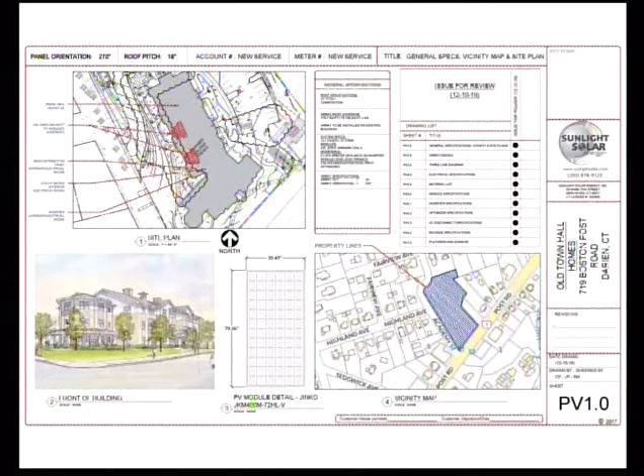Here's a closer view of those locations. They are located between the eaves on the building, and this is the long side of the T of the building. Again, going back into the site, these will not be viewable from the Post Road, and they are well hidden on the roof line there.

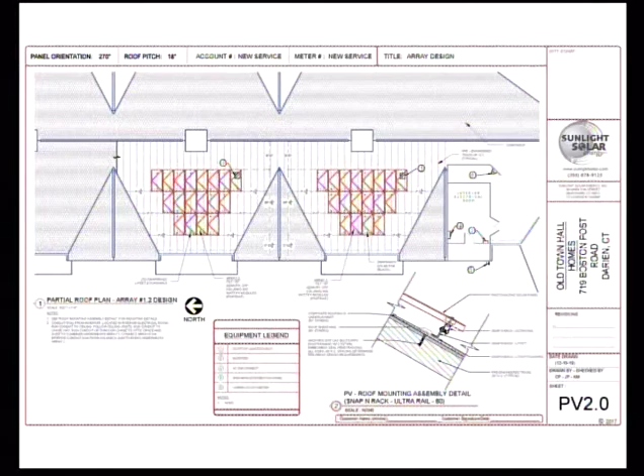So this is a small array, about 16 kilowatts.

Oops, sorry, how do I minimize this? You'll be able to see it if you're coming off of Highland, taking a right or a left onto Academy Street, and they will appear as they are there between the eaves.

So what you're saying, Todd, is when you're back in the neighborhood on the north side of these buildings, if you take a right as you're coming down Academy towards the Post Road, you'll be able to see them. Coming south on Academy, you'll be able to see those, but you won't be able to see those when you go north on Academy up towards the housing. You won't be able to see them going north or south. You'll be able to see them coming off of Highland going east.

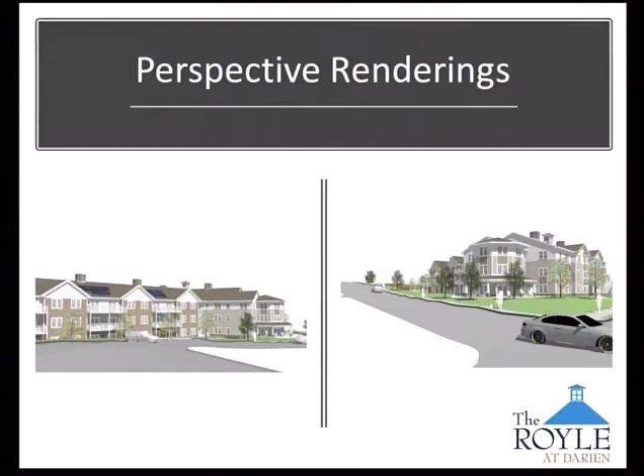Okay, is that it? Because I'm going to dive into questions, I don't want to cut you off. Yes, that's it, and we can definitely dive right into questions and try to respond to anything you have.

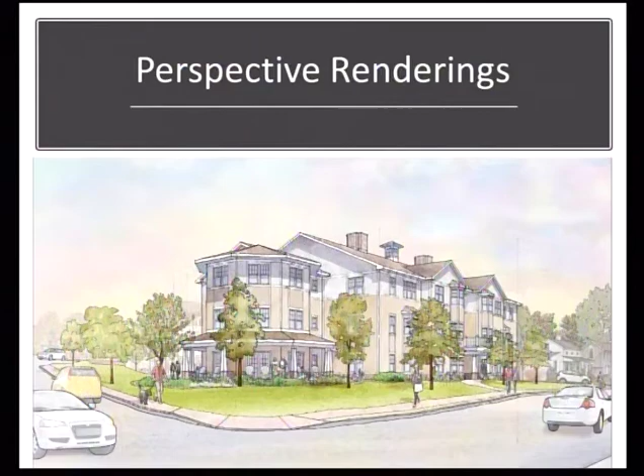I'm going to ask you a first question that I've kind of dialogued with the ARB ahead of time. Why did you choose this location as opposed to doing panels on maybe the eastern side of this roof building or an ulterior side that you couldn't see at all from a residential area?

The solar arrays have to be on this side to optimize the rising of the sun. Because on the other side, because of the way the pitch is, and also the direction it's facing in, the solar array would not be effective from that perspective. Got it, okay, thanks Todd.

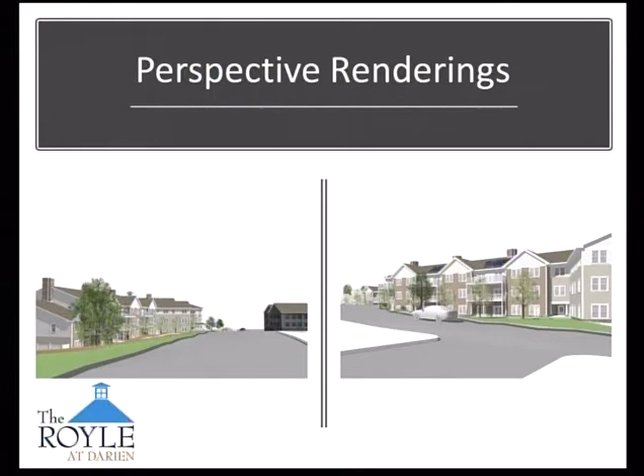The only other opportunity we had to pick up some optimal areas for the solar was along the Post Road. We elected to leave those off. We thought it might be objectionable, and wanted to present a cleaner finish to the Post Road side, which is really our entrance. I agree on that point. I figured where they are being put is the best location, with regards to the view and the roof lines. I was just seeing if there's any other way to maximize the coverage, which I'm sure has been reviewed thoroughly with the installer.

So besides that, solar panels being what they are, I have no objection to having them put on there. I'll mute myself. Dave, thanks so much. Those are great questions. Next up, Sean Brown.

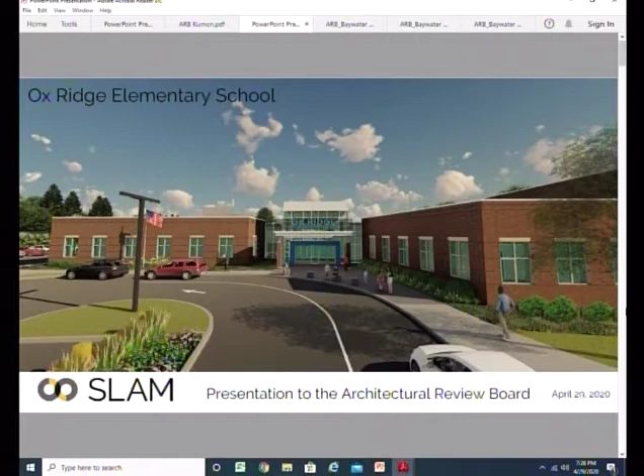And this is the site plan. Can you see the site plan on the screen? Unfortunately not, you lost it. It went to Technicolor bars. Okay, wait a minute. I'm going to try sharing the entire screen. Okay, no worries, Amy, we understand this stuff, there's always technical fun at the beginning here. Yeah, great, we got you. Is that any better, Amy? Yep, you did it, good job, okay, there you go.

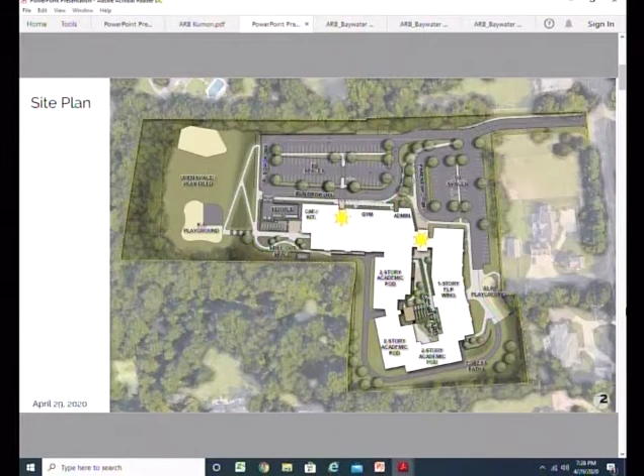So that should be the site plan on the screen, and I'll let Dean go ahead. So we're talking about the new Ox Ridge Elementary School. If you can follow along with some of the text on the building, I'll talk about that first. To the left-hand side is the cafeteria gymnasium component, which we're calling the assembly wing. Directly adjacent to that, on a slightly upward level, is the administrative component and the entry component, indicated by the star. I should point out that the second star is a secondary entry that relates to the bus drop-off. So what we really have is two entrances: one for parent drop-off at the upper lot, and a secondary entry related to the bus drop-off component there. You can see that queue of buses along that long stretch of pavement there. Parent drop-off, again, Amy was using the cursor to indicate parent drop-off there.

We've developed a two-story academic wing. We're calling them pods, there are 3 pods on 2 different levels. They are associated with grades, and they are linked together to create that donut shape with a 1-story ELP wing, which is the early learning program. There is an early learning program playground associated with that wing, and to the very left-hand side of the screen, there is open space and playgrounds associated for the elementary school.

The site slopes from the entrance to the left-hand side of the open space quite steeply. This has allowed us to create these plateaus. The open space and the playground exist on a plateau. You can see the shading there—that is a slope that brings you up to the next plateau, which is the parking lot and the assembly wing.

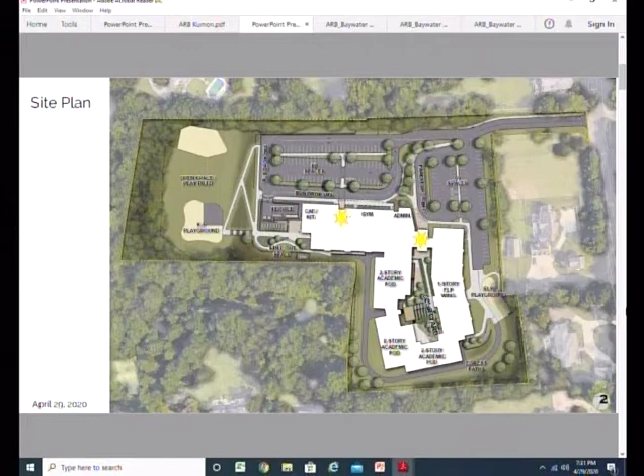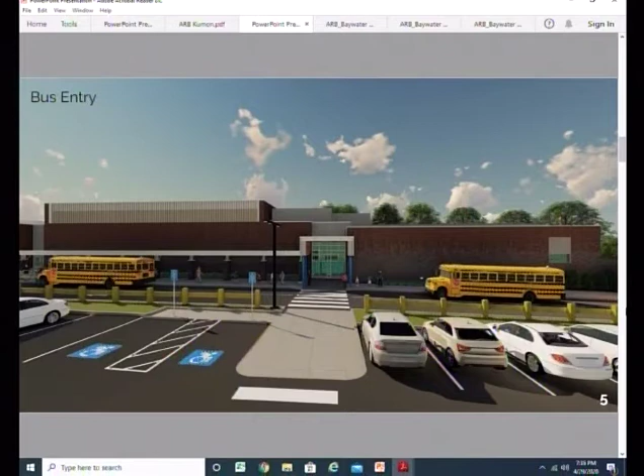There was some discussion last time about the columns. As the design has progressed, the entry canopy at the main entrance has gone away, and this entry canopy seems to be more functional as it provides cover for the students as they get off the bus. We've gone to a single column which is pressed back, so we've tried to negate some of the issues that we had with too many columns.

I think we feel that this provides a clearer path for the students to get off the bus, quickly move to cover, and then move to the entrance. You can see we've used a series of smaller blue columns to help act as identifiers to the entrance.

So anytime we use a gesture to signify entry, we use a blue gesture. We've employed a clerestory, which is a polycarbonate material that is slightly opacified so it lets muted light into the gymnasium. We've also used screening right above the door to help hide much of our mechanical units.

We've also employed a pattern in the brick here called an Ombre pattern. It's a two-color brick. We've used accent brick and body or main brick throughout this project, into the classroom pods and the ELP. So really what we have is a building that kind of grows out of the ground, and we think this helps root the building to the ground, using those two bricks in a playful way that speaks of an elementary school.

There you get a better sense of what that Ombre pattern is - kind of the gray brick at the base that fades into the body brick, or main brick, right there on the right-hand side of the rendering.

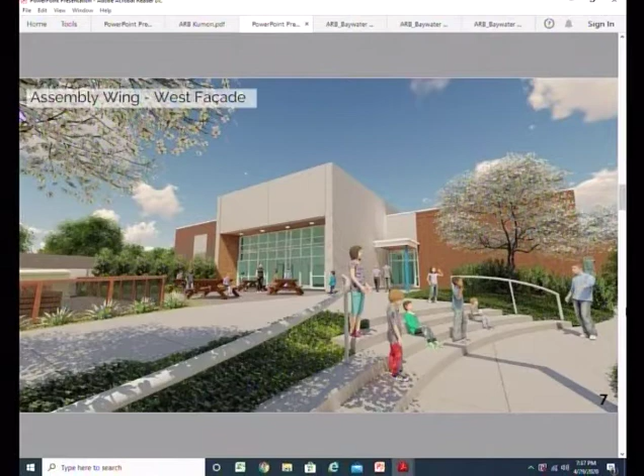As we move around the building, we're now looking at the tail end of the building, which you would begin to see from the open space or the playgrounds at that lower level. This is the cafeteria.

We're using that same wood-look piece here to soften the soffit and the walls as you look out of the cafeteria. This has a very transparent look so you capture the view out of the cafeteria to the playgrounds. There's a patio outside the cafeteria for outdoor dining and spill-out that could also be used as classroom or teaching space.

Directly adjacent to the patio area is a garden, which is part of the curriculum. There are raised garden beds, and we really like the idea that this could perhaps be used by the school as a farm-to-table type aspect, but it also has an educational feature to it.

Directly adjacent to the box of the cafeteria is an egress or ingress point to the building. Again, we have a blue column signifying entry. This allows students to go to the playground and into the building in the morning. We've created a series of steps here that act as a mini amphitheater and gathering space for a class of students and some outdoor teaching, beginning to connect you to the backside of the building.

Okay. I think we only have one or two left. This might be the last one.

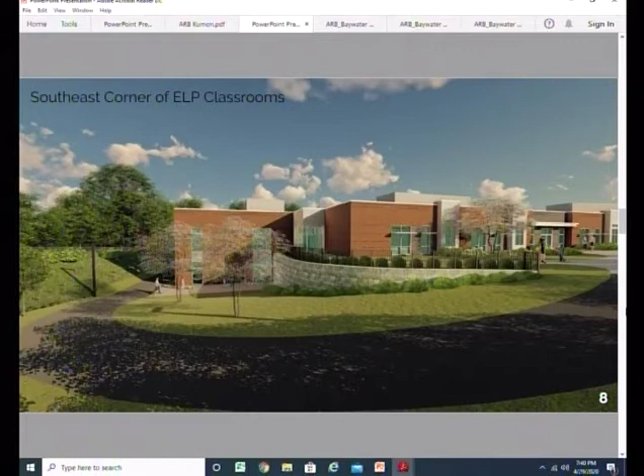We're using that cast stone head over the window. There's a soldier course of brick that links the window heads together, and underneath it, as it relates to the mullions, there's a protrusion that adds a level of texture to the facade.

Further, we have a brick sill that has a relationship with the soldier course that ties the heads together, and you begin to see a soldier course and more protrusions at the top to create a capital, per se, to this wall.

In this rendering, you begin to see that you're not able to directly walk up to the window, as the landscape is acting as a buffer between the sidewalk and the building itself.

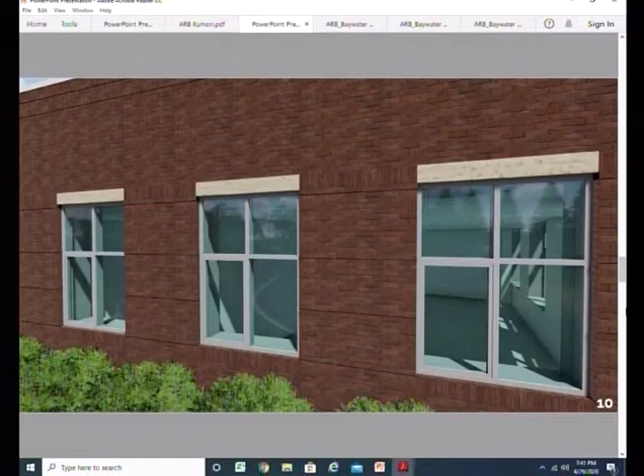The material between each window and the two-story piece, which also acts as cladding on the cafeteria, is this metal panel. This is a 12-inch sample, so that's a 6-inch face with that reveal there. We're trying to give a larger volume a smaller scale, one that feels more residential and clapboard-like. The aluminum soffit is actually a wood-look soffit.

That was the piece underneath the bus entry and at the cafeteria. The mechanical screening—unfortunately that picture is turned the opposite direction, it runs horizontally, not vertically, the ribs—but it's a perforated metal panel that is the same color as the metal wall panel, with a perforation so you begin to see sky through it as it screens the mechanical equipment.

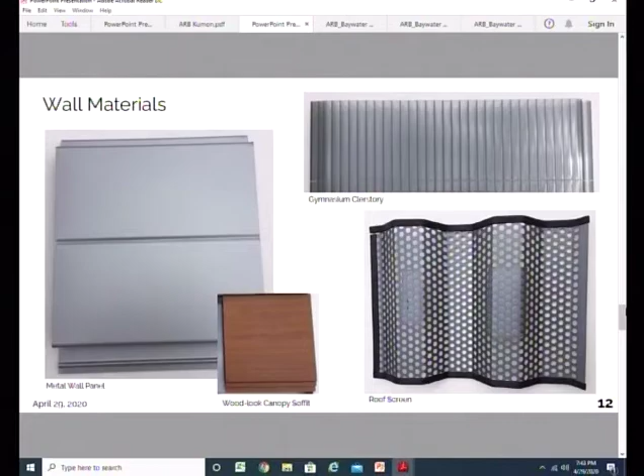And now we're open for questions. Hold on. Whoever's talking, can you please identify yourself and your relation? Oh, this is Sean.

Thanks, Sean. Hey Dean, on the bus entry you've shown on your screen versus the pictures in our packets, the handicap parking spaces have changed design, and you've removed the tree just to the left of the entry sidewalk. Is that the correct drawing you're showing, or is the one we have correct? This rendering is correct.

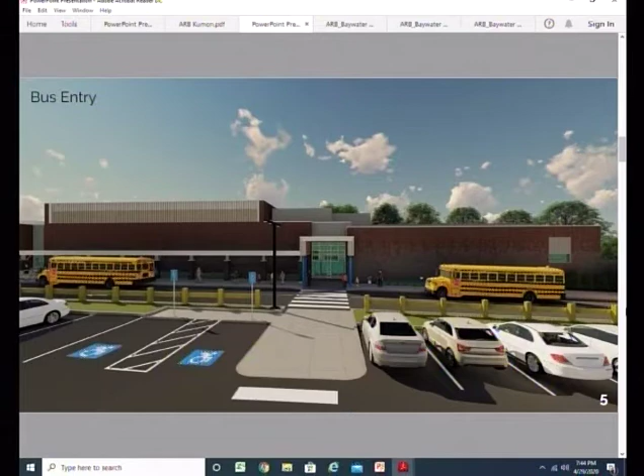This is Amy, if I could explain. I didn't know you had a different image, I apologize—I thought I sent this exact presentation. But we have been maximizing the number of parking spaces as we look ahead to the planning and zoning meeting coming up on May 12th. We recently received word from the superintendent of schools and the principal as to their exact faculty count, so we've been working to maximize the parking count, and that was one of the sacrifices we had to make on this location.

Sean, while you're on, do you have any other additional questions? I got one for Amy.

Okay, Amy, where are we putting the address for the building on this? Because normally I like to put it on the front door of the building right above the entryway. I usually like to ask, but this has got a long driveway coming in. I can't remember what we decided for signage with the team, the building committee up on the street.

Sure, so I did pull the signage photo out of this presentation because we haven't developed the exact sign yet, Sean, but our intention is to replace the current sign in kind. It's designated by the planning and zoning regulations to be a certain size, and it's a hanging sign, maybe 3 feet tall by 2 feet wide. That's where we would put the sign, and then 395, which is the street number address for Mansfield.

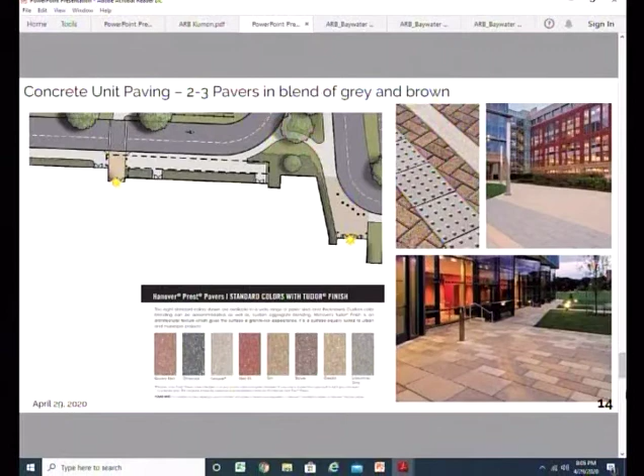This is a section we shared in case you were wondering about the site materials. We have concrete sidewalks, traditional concrete, for the most part. But at the entry, this is the main entrance of the building, and down here at the bus entrance, there will be pavers in a blend of colors. These are the standard colors the product comes in, but we'd select the gray color, limestone gray, to match some building elements, and brown or tan to blend with that, just at the entrances.

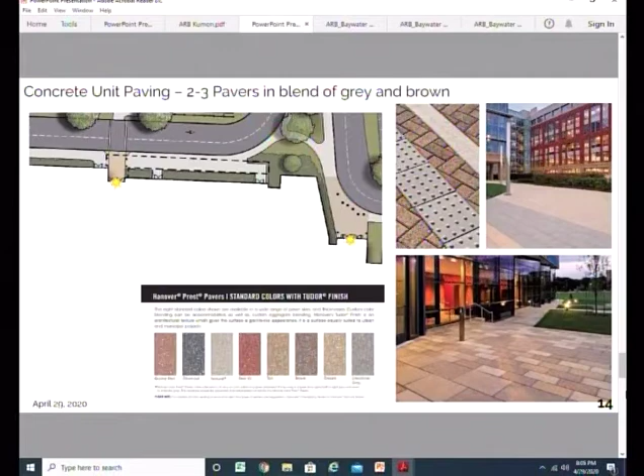What are the little bumps, the spots with the bumps going up there? Oh, sorry, this is a specialty crosswalk paver. Is that for sliding, for slipping? It's for indication, for those sight impaired to feel that they're nearing the driveway.

In terms of all your flat paving, you're doing several different styles. Are you going to put the paving together the same way, so it has some unity, or will they all be slightly different? I'll go back to a rendering that shows a bit of the pattern. Difficult to see, but the intent is for a specialty paving pattern right at the entrance only. Otherwise it's just a concrete sidewalk.

Okay, and that goes through the other entrance too, with playgrounds and the rest of the stuff. Is there some continuity between the colors? I know some look very brown and others gray between the different paving elements. Right, so the photos you're seeing on the materials page are just a sample, a photograph of the product at a different building. But we'll be selecting just 3 out of all those colors, and they'll be complementary to the brick tone of the building, as well as to the gray brick.

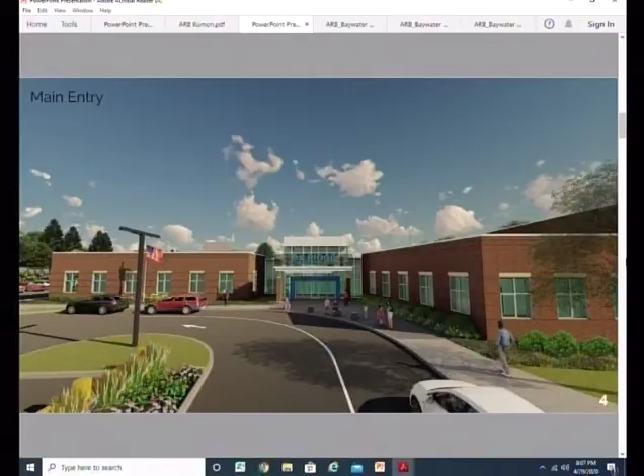My question was about having some unity, it wasn't clear. All right, thank you very much. You're welcome. Okay, that's everyone through the ARB. Does anybody else have any other questions? If you do, you can unmute yourself and ask one at a time, if anything else has come up.

No, great. All right, Fred, you can remove the screen sharing. That wraps up the presentation for Oxbridge School. Amy and Dean, and I can't remember who else was on your call. Amy and Kemp, thank you guys. Based on the feedback here, it looks like you've gotten a favorable report. Congratulations, good presentation. Thank you. The one feedback I'll note in my letter is the consideration about using a larger panel at the front entrance to make more of a monolithic look there, like was discussed.

Yep, I hate this thing. Okay, and someone's off mute that I can hear. Sorry.

The last thing I'll add, when you return to us, you'll be coming back with a signage plan at a later date. We look forward to seeing you then. As part of that signage plan, I didn't see any plan for the lighting on the site as a whole, a larger lighting plan. So if you guys could include that when you come back with your signage plan, we'd appreciate that. We don't have to waste time here. Exactly. Okay, will do, thank you.

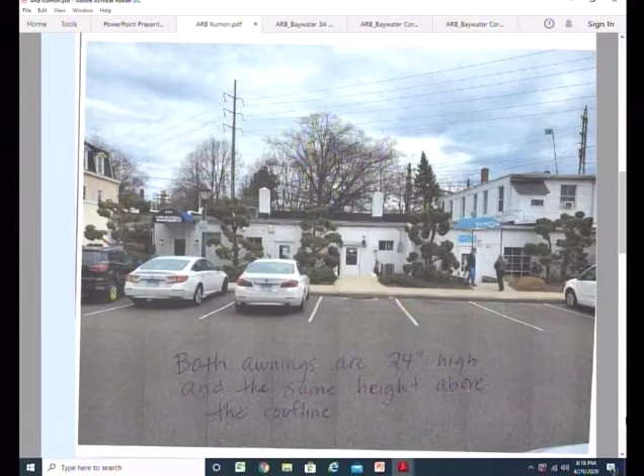Yeah, to be honest, I don't know how much consideration was taken into the lights when they did the rendering itself. This picture looks quite different—you can see them from that first picture. Is it the same fabricator as the Caldwell? It is, okay. Well, clearly he's just not drawn it the way he'll actually do it, because it'll have to be some kind of a cutout to accommodate the fixture. Right. Yeah.

I did notice that the Caldwell awning comes forward of the gutter, because you've got a gutter there that's active. So it's going to come forward of the gutter, and then it has to work around the presence of the floodlights. I don't think there's anything we can resolve tonight necessarily, but just note that this isn't exactly what's going to happen because of the lights.

Rita, based on what we did with Caldwell, do you have any suggestions or improvements there, or is that something left to the installer's discretion? Yeah, I think if he's going to follow the model of Caldwell, he will make some accommodation for the lights. It's a great opportunity to have a nicer light there, but in the interest of economy, I guess you can work around it.

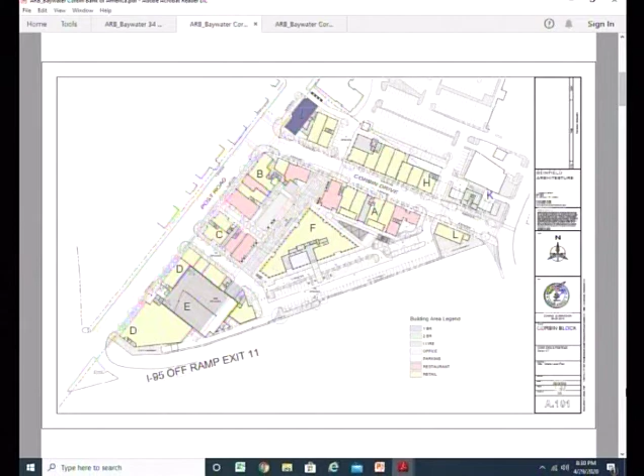And this dark shaded area at the front along the Post Road is basically a new 4,000-foot space that's been designed for Bank of America, working with us and their architects and our architects.

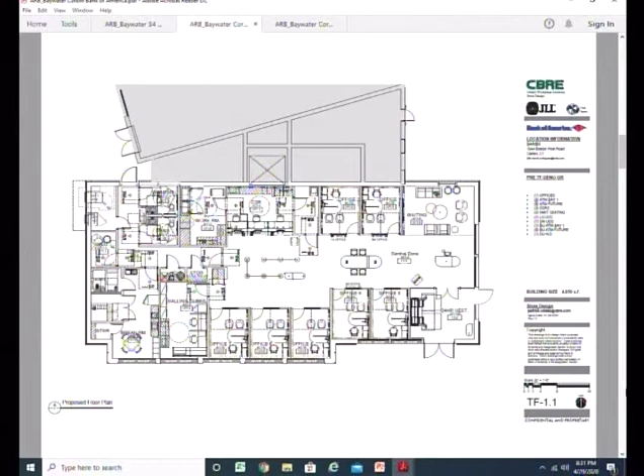But this is an interior, just showing you kind of the layout. This is the Post Road. This is the area alongside the drive-through, if you can see my cursor. And this is basically the office. It's a typical office, but they'll also have some money manager people in there, mortgage bankers. They want the reception to be on the corner, and they want an entrance on both sides, on Corbin Drive and on the Post Road, into this 24-hour vestibule that would have an ATM at the entry.

Another view, just for background. This space adjacent to them in the L will be combined into one space. This will be Barrett Bookstore, and that's already been worked out with Barrett to relocate, so we get to preserve the local bookstore, which we're excited about.

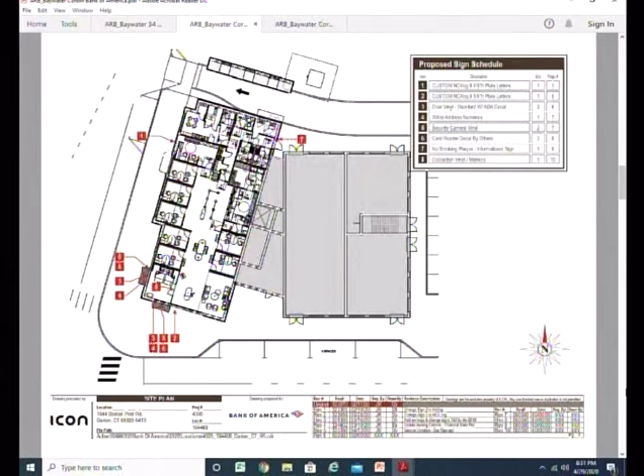And this is the signage. The upper portion of the image is the signage along the Post Road. That's the Bank of America logo with their flag insignia. That letter is 9 1/8 inch high, so it's in accordance with the regs. And there's a similar size sign on the Corbin side, which would give them a view toward the Post Road for passengers traveling down the Post Road toward Norwalk.

I just want to move this. We may come back to you as part of the Corbin project, similar to what you reviewed for Federal Realty, where you did a district-wide signage package. We may do the same thing, request the same thing for your consideration.

And as part of that, we would like to be able to do more blade signs. We love the blade signs. We think they add character and texture to the downtown. Bank of America would like to put a blade sign here, but they didn't finalize the design, so we're not asking for permission for that now. We'll talk about that in connection with the overall district signage program.

Got it. So Dave, sorry to interrupt, but that was one of my questions. So you proposed 2 wall signs and a blade sign in this proposal, but the blade sign, that's why we didn't see it in this package. You're correct.

Okay, great. Yeah, we couldn't get it agreed, so we thought we should just come to you with the total district signage. Honestly, we would not be bothering you with this application even at this point, but for the fact that Bank of America is basically refusing to sign the lease until we have everything approved. So this has been a very bureaucratic, tough process.

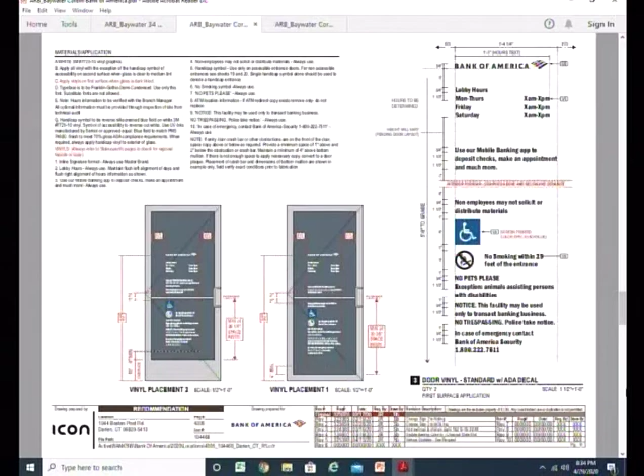Okay, and this is something I would very much like your feedback on. You see these frosted panes of glass? Yes, not the prettiest sight. I'm just going to go back for a second.

Bank of America would like to frost all of the glass, basically all of the lower level glass along the post road. I have to be careful what I say. I don't particularly love that idea. I had a view of what your thoughts might be on that. They're saying it's a new standard, but we know there are other locations where they haven't done it.

They are telling us this is very important to them in context of moving the branch. So what we would ask you to consider is that request. If you have suggestions as to an alternative, like privacy screening or using some kind of glass treatment that would provide them with the privacy or security they're looking for without closing off the branch—that's a long facade, and so we're a little worried about it. But we have to, given our position in this situation, advocate for it, and it could jeopardize the lease.

That scares me, to be candid. But we would like your feedback on that, and I guess we could talk about all your questions at the end. But that's the one thing we're a little worried about.

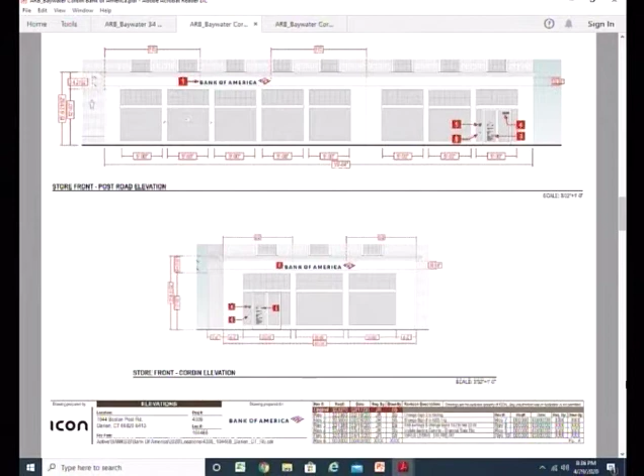Okay, got it. This is all the detail on signage, like hours and details of the logo and lobby hours and so on, on the doors. That's the number, at 6 inches and 11 and 3/4 inches across. This sits—let me just go back for a second to show you where that is. I apologize. That sits above, in the right hand corner of this door, the 1044, and that's in accordance with the town requirements now.

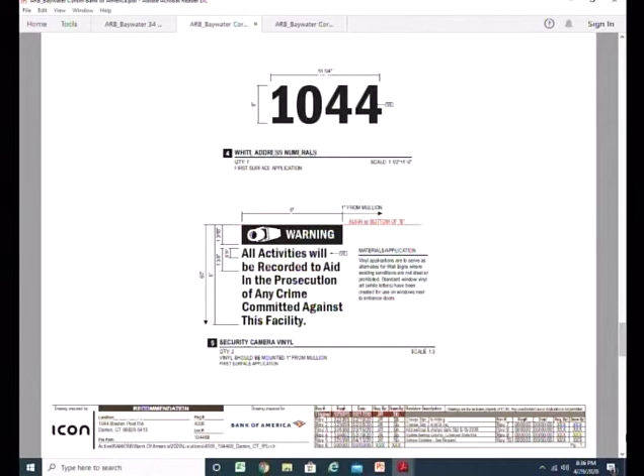And this is the typical signage for the ATM entry. No smoking—that's a building standard or bank requirement now. And that's it for the Bank of America signage application.

Okay, that's great, Dave, that's great. If you're done, we'll just go through the members one by one, and we'll have them also—hopefully some of them might be able to address some other suggestions for the frosted glass option. So it's just the two wall signs, and then the door? Yeah, I think the door static cling work, which looks standard, and then the glass. Yes, correct. Okay, correct, great.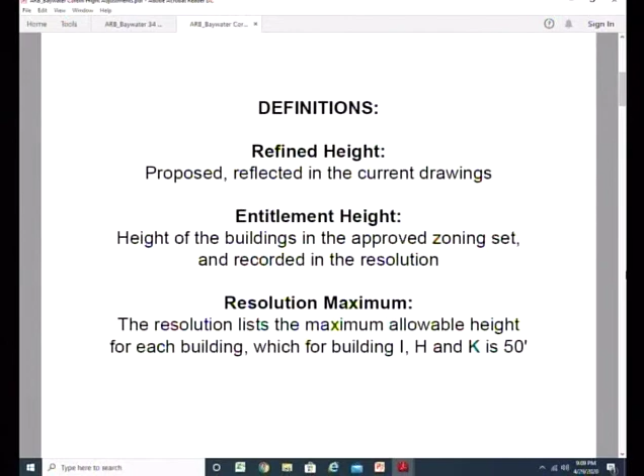So this is what we call Building I. This is the Bank of America building that we just talked about—that's the branch, this is the drive-through. The building below, the drawing below, is what we originally designed.

Beinfield Architects was trying to build, in the original design before Bank of America really engaged, a building that would be kind of a sister building to 1020 Post Road. You can see it had a more residential look on the post road, with a typical storefront here. We thought the bank branch would be smaller and that this would be a different store. It turned out the bank wanted the entire post road.

Most importantly, the owner of the building, Vinny Durentis, and his wife Kathy, did not like the dormer-style windows because they had seen the buildings at the apartments at 1020 Post Road, which have those windows. They're not as light, not as bright, and the ceiling heights are lower. So they wanted to do something different.

So working with Bank of America, Vinny, and all the various parties, we came up with this redesign of the building, which gives us more of a full 2 stories. We still have the dormers, but they're expanded. There's a different storefront, and to accomplish this we increased the building height by 8 inches. It's still 7.5 feet below the maximum we would be allowed.

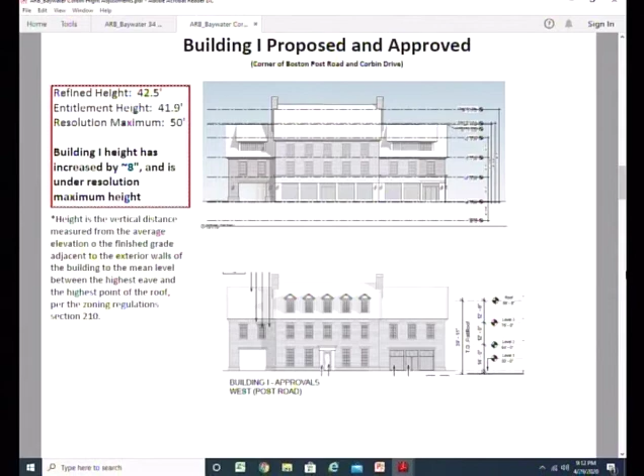And then the last building, the Tibbetts building, the refined height, or revised height, is 41.8 feet. The entitlement height was 44.5 feet. The resolution maximum was 50 feet. So we reduced this one by almost 3 feet.

What we also did, because we had more time, is change the bottom image as well. The bottom image is the Corbin Drive elevation. You can see it had a door here and just typical residential-style windows. These are actually 2 stores.

So when we thought this through further with Bruce Beinfield, this didn't really work. So the image above is the actual proposed version with proper storefronts. This will be the entrance to the apartment building, and this will be a small store, and this will be a small store. So the basics of the building didn't change much.

It's a little bit different. These are garages, there's not stores here.

Kate, weren't we talking about putting a door here too to make this kind of look symmetrical? Yeah, we've been playing with the location of that door right now.

The elevation drops, right? Yeah, we have a bit of an elevation drop. So we have that door actually exiting out the right side of the elevation, into the small park, where someone can exit out there and then come around to the front.

But we may sort of work in a symmetrical door instead. So that's the summary of those changes.

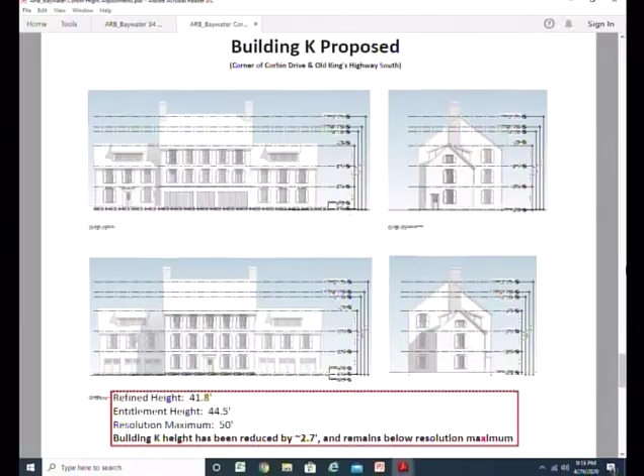Liz, could I just ask a procedural question please? Is the ARB now reviewing the changes to the height of the building, or are we reviewing the changed design of the building?

We're actually going to consider everything. Oh, okay. David Riley? Yeah, that was my exact question.

The height question, I don't think is really an exception. I don't think there's any detraction, and I think there are some improvements in the height. But in the scale of the buildings, it's very minor, and it falls within regulations, so I don't have any problem with it.

What I would like to address is some of these facade changes, because there are substantial changes on the facades. I think the roofs are more minor in comparison to what's been done at the base level, particularly building H, I guess is the longer one.

As part of our Corbin redevelopment project, we are proposing to reconfigure the parking lot again, a second time, behind 10, 20, and 36 Old Kings Highway South, in a manner that would allow us to create more parking. And so by buying this building, it allowed us -- this is the actual property line, this triangular shaped land -- to take down that old residential building that's been used as a private office for the last 15 or so years, and create a more modern office building, which actually we're going to move our offices to.

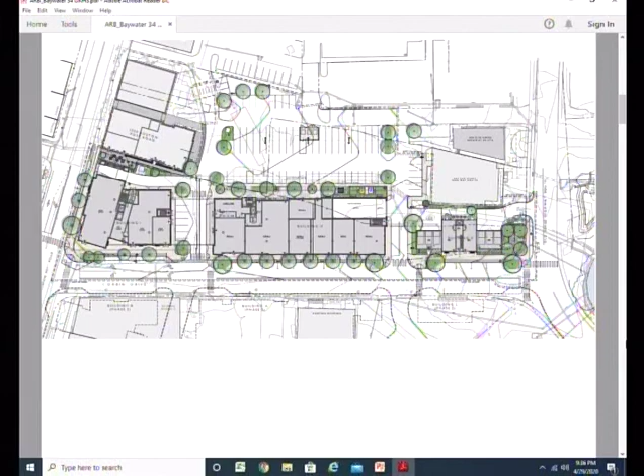What we're hoping to do is continue the pattern of improvement from 36 Old Kings Highway, from what it was to what it is, from here, and in the back it looks quite ratty, into something much more interesting and a bit more modern.

And so with that, I'll turn it over to Colin. I'll change the slides if you want to talk through the design, and you just tell me when to make changes. Sure, so you picked up the context, so I have to skip ahead in my notes to where you are.

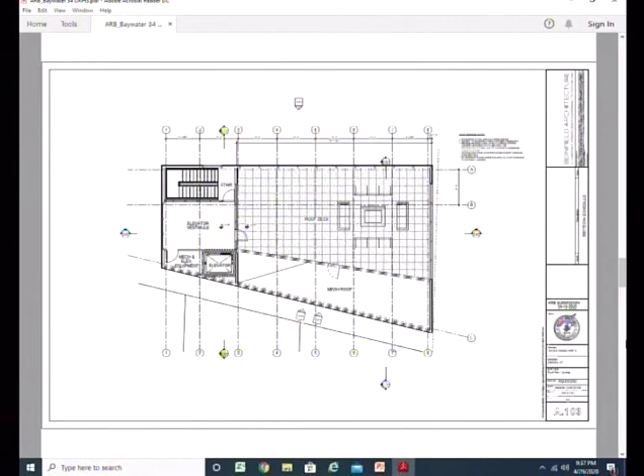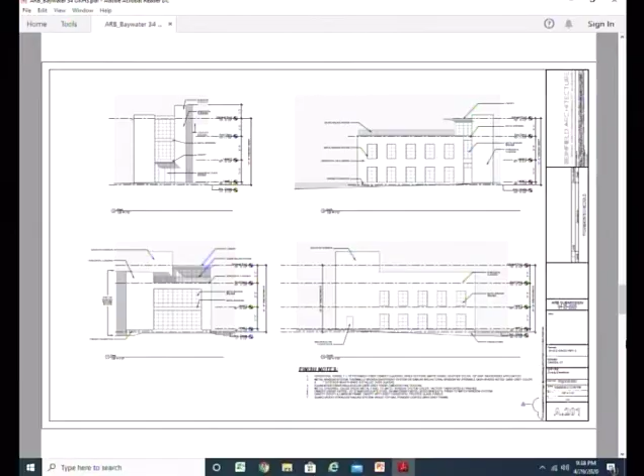So what you're seeing now is the north facade. It's a very regimented composition of windows that address natural light into the building and the private offices on that facade. The side facing the public parking has a covered awning for the main entry, and then large windows that allow light on the north side of the building.

We're accentuating the elevator core, the element on the right that projects a little bit higher, while also concealing and providing some transparency and differentiation in the height and massing of the building with that solid corner as it conceals part of the interior circulation stair. The top portion of that building is access to a roof amenity terrace for the office tenants.

The composition of the facade is primarily being looked at as fiber cement, a durable, thicker panel than your typical Hardie panels, so it's not that lap siding. It's being thought of as a more rigid, panelized product, a bit more specialty, with probably a regular rhythm of fasteners or concealed clips.

We're going to be looking at a glass and steel canopy, and potentially a folded metal canopy of some sort, metal windows with probably an operable sash in places, and a matching divided light shop front or similar window system.

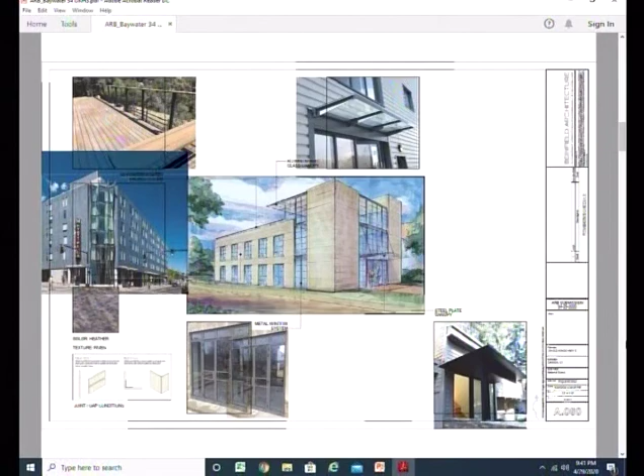Great, okay. Yeah, David, that's a very good example of one of the thicker, more high quality fiber cement panelized products. So that pretty much closes out my summary of the materials. These are just some other visual examples of how these read with a little bit of a gap reveal between the panels, and you can see that some of these have exposed fasteners, like this image we're looking at now. We can move on to the next slide.

The site plan is fairly basic. It's a little bit of a wedge-shaped site, so the building is somewhat trapezoidal and a little irregular. The parking's at the back towards the public parking, and then there's a public plaza being reconceived from what you've received, to be a bit more integrated with the Corbin District design philosophy.

Just to remind you of what's there today, there's parking in front that's kind of hodgepodge. What's happening is we're creating a bit of a mess for ourselves, but I think in the long run it will be worth the pain.

We hired a different landscape architect, Eric Rains, to help us with the landscape design for this project. Eric did a wonderful job laying out the sidewalks and the entryway.

We have two different landscape architects working with us on the Corbin project: a group called Towers Golde out of New Haven, and a sort of sole practitioner, very spirited, creative guy, more of an artist, named Dennis Dale from Massachusetts. So we have the two Corbin landscape architects working, and we had the other architect working here.

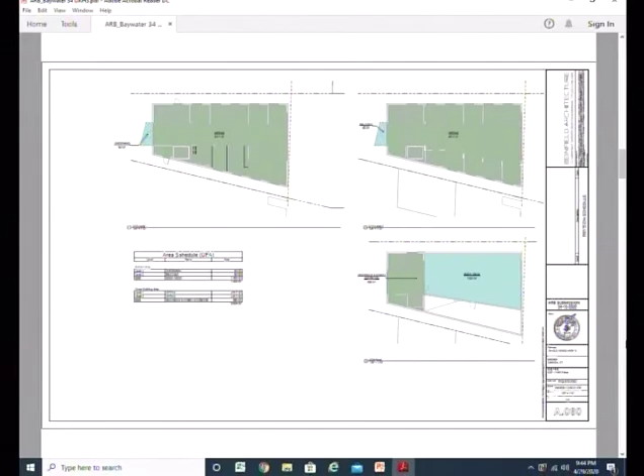This is the original landscape design, and it's been tweaked a little bit. We're going to come back to you also and talk to you about this landscaping when it's further refined.

But the architects came up with an idea of creating a bosque on this side of Corbin, of Old Kings Highway South, to create a really nice venue that the public or residents of this property could enjoy. So those architects have been looking across 23 Old Kings Highway toward 34, and they came upon the idea: what if we were to integrate the three and create a public plaza in front of 34 that's more rectilinear?

So David, you don't have a full architectural landscape plan right now, just ideas — right now you just have the building itself. Yes, exactly. That's okay, I think we have to come back to you.

We're trying to go to zoning in June, we have a hearing date in June for the building. We're totally happy to come back with more refined and detailed ideas, but I'm sharing some color for your general feedback if you like. If you'd rather put that on another night because there's enough to talk about with the building, that's fine too.

But I wanted to give you a sense of how this is being considered and what we're thinking about, which would be to create these three new, wonderful outdoor amenities that don't exist today.

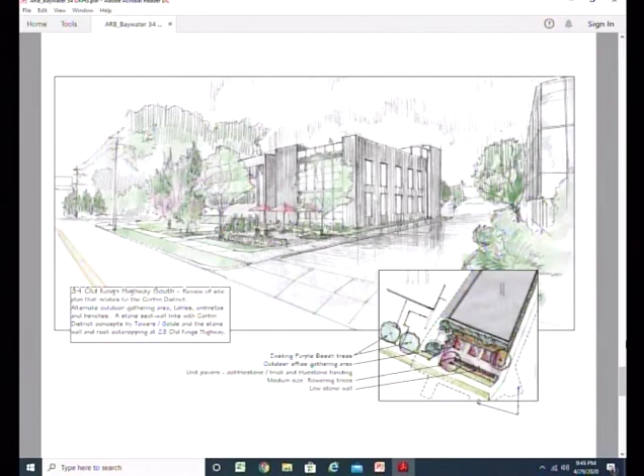I love that, David. Are you guys done with your presentation, or can we jump into some questions? Happy to jump into questions, unless Colin has other comments he'd like to make on the building design. No, I think the elevations tell the story, and the rendering covered two of them already.

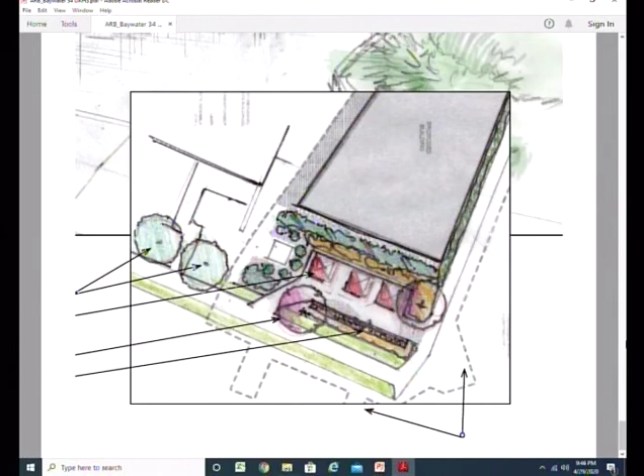So the south is essentially a repetition of the north minus the stair differentiation, and then the east — we've got an expansive window that looks out over Old Kings Highway and this new public plaza, and the Good Wives River watershed across the street.

Let me help orient yourselves, because as much as I've worked on this, I sometimes got confused for a while. This facade, this elevation, is what faces the Center Street parking lot — what one would see looking at the building from 1020 Post Road, from the back of 1020 Post Road. This is the facade that faces Old Kings Highway South. Remember, as Colin said, the site is trapezoidal, so it's an irregular shape.

It's really triangular, but it's broader, it's wider on Old Kings Highway South. So this faces Old Kings Highway South. This is the elevation facing the driveway from Old Kings Highway South into the Center Street lot, between 34 and 30 Old Kings Highway South. And then this is the facade that faces 36 Old Kings Highway South, which is going to be pretty close to 36, so there's not a lot of room.

I forget the exact distance. It might be 6 or 8 feet. It's not much, I think it's less. I think it's 5 or 6.

That's great, that's great orientation, guys. That really helps. David Humphrey, can you kick it off for us? And then David Riley.

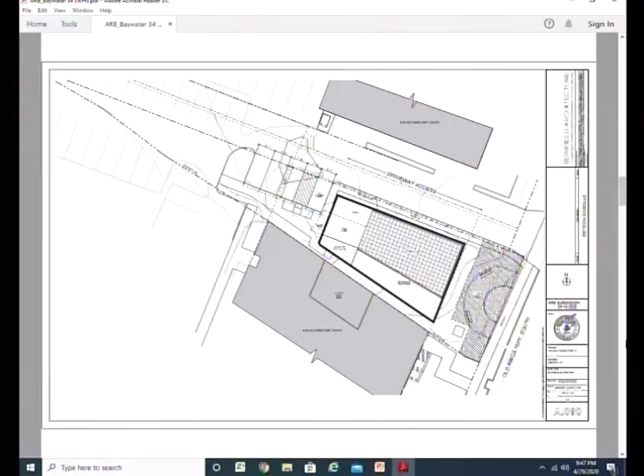You don't have anything that... I think, kind of on its own, it's a very, very interesting design. I think it'll help to see the material. How close is either some photos or I'll do my best to get there and see it in person. How close is it? Because that's a big part of this design, just based on its massing.

It seems to kind of somewhat tie with the building next door, which I think is interesting. I was just wondering whether you have anything that shows visually yet a sketch of how it plays with the new development, because obviously you have an opportunity to do this all at once.

I think the landscaping, using that to tie these two together, is a smart idea. But I'm just wondering whether you have any sketches yet that might show how, I guess it would just be the back of the building, how that ties in visually with the rest of the new development.

No, we haven't developed anything like that yet. Okay.

I think that's something we can have the landscape group look at. They started with that view covering the back area, the park area of 34, looking in the direction of the new development. One of the unifying items they really wanted to incorporate into both the area around Building K and this new building is a low stone wall. The landscape person David mentioned, Dennis Dale out of Massachusetts, has a really great eye and attention to detail, and has some great ideas about how to articulate a low stone wall that can carry the property and wrap over to the building area, with some of those small unifying elements.

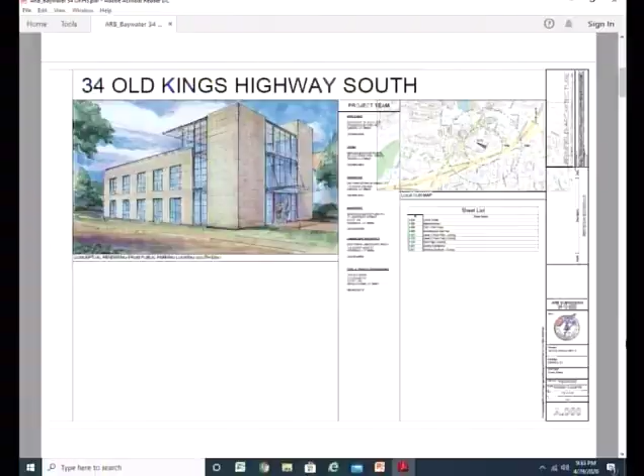Yeah, I confess I chickened out on the Ipe wood. Well, I think you could run into some longevity issues there. It would last long, but there's a lot of upkeep if you want to keep it looking the way the picture was showing, or you let it weather, which is an option.

It's a pretty major change to go from the Ipe to a fiber cement. Yeah, that was a late call, that's on us. We're definitely not functioning as normally as we would given this remote work situation. That was my audible a couple weeks ago, wanting to look at this in a different way. I just got nervous about the potential variation of how it would age, given how close we are to the 36 Old Kings Highway facade, and how variable the light hitting it would be.

I just worried we'd have different aging patterns on the wood, and it would look inconsistent. Actually, let me jump in on the Oxbridge school presentation. Slam had an aluminum material with a wood texture to it. Maybe that's worth considering. I thought that was a very appropriate material for that application.